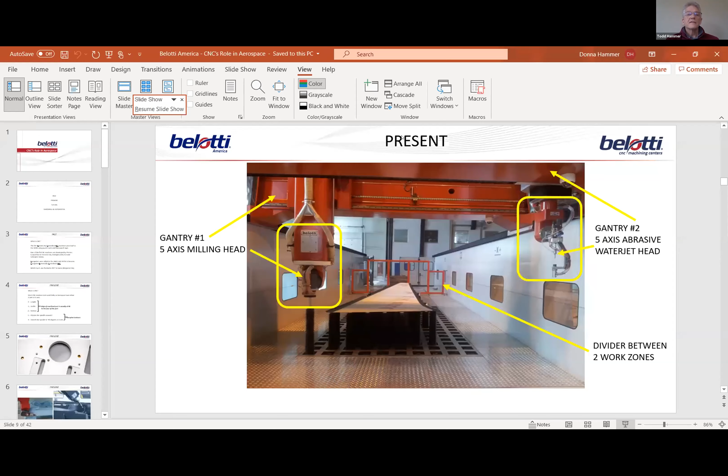I've proudly represented Italy for decades in the machine tool business, and my presentation is just a quick talk on present and future, but I think it's also important to mention a little bit of the past and how aerospace ties into automotive going forward.

For those participants where CNC or NC is not a familiar term: NC is numerical control and dates back to the 1940s, when punch cards and punch tapes were used by a company called Parsons Corporation in Traverse City, Michigan, to start making helicopter blades using digital input.

Fast forward to 1977, and Belotti Spa was formed in Suisio, which is a small village just outside of Bergamo.

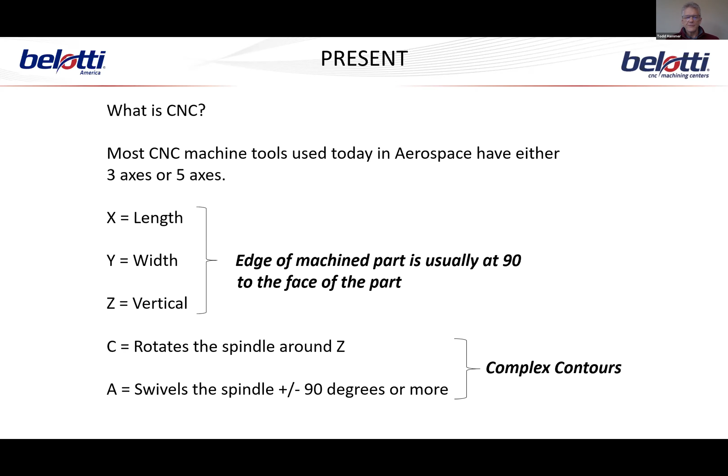In the aerospace industry, we generally see one of two types of machines used, either 3 axes or 5 axes. X and Y indicate the length and width of the machine, and Z the vertical. More often we see 5 axes, which adds a C axis that rotates around the vertical, and an A axis, sometimes referred to as the B axis, which swivels around the C axis.

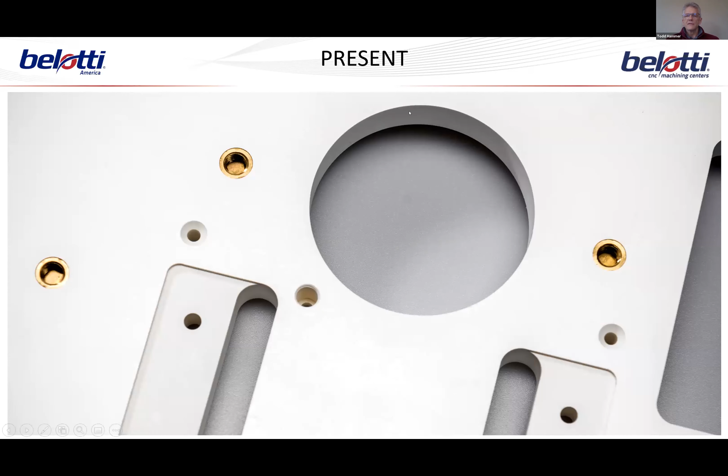Here you see a typical 3-axis application where all of the machining is perpendicular to the face of the part. And here you see a couple of typical 5-axis applications where you're shaping a contour, or in this case, trimming and drilling.

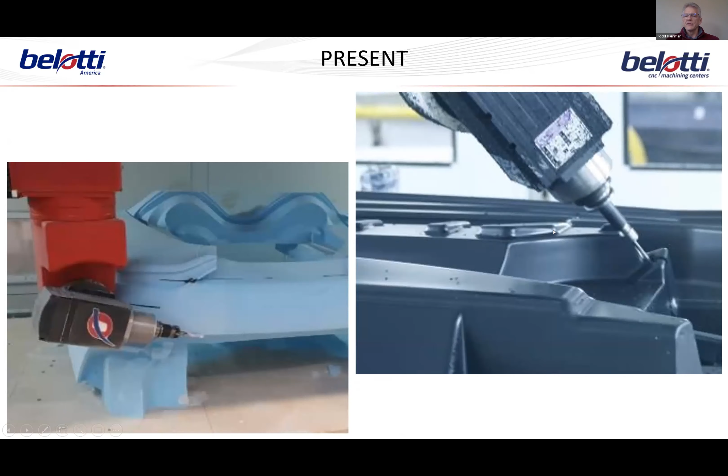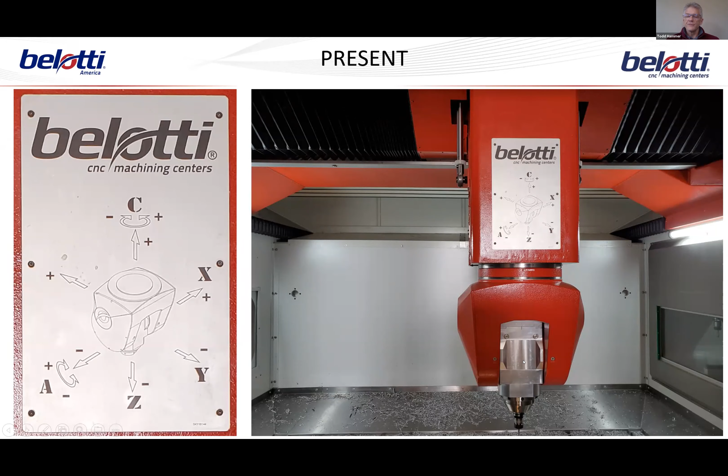Here's a closer view of these 5 axes and an example of a typical 5-axis head: your Z-axis, your X-axis, Y-axis, and turning of this head for C, and swiveling of this spindle.

What's important is, even though an aerospace part, in this case aircraft, may be very thin and appear flat, because of the makeup of the composites, it's still necessary to mill this with 5 axes in order to have the cutting tool perpendicular to the composite material.

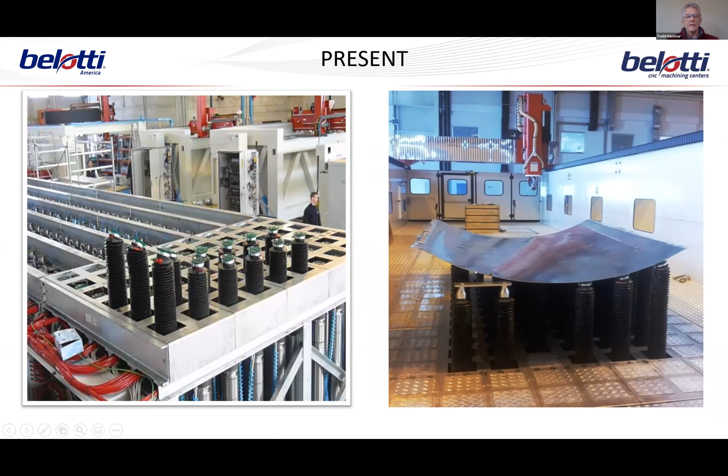Here's a typical application in aerospace where it's difficult to see, but we've got a machine with 2 gantries. One gantry has a 5-axis milling head, and the other gantry, closer to the viewer, has a 5-axis abrasive water jet head. In this technology, we'd use the abrasive water jet head to rough out the geometry of the part, then come behind it and do a final trim and possibly some milling of pockets or drilling of holes.

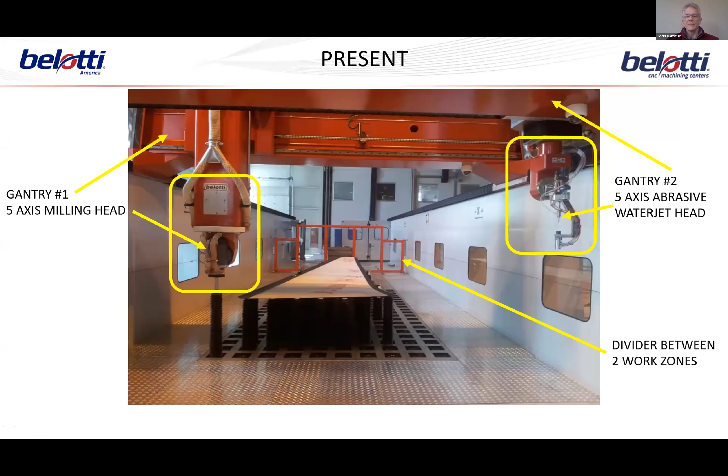Nowadays, if you've flown on an A350 from Airbus or a 787 from Boeing, you'll see there's a lot of talk about composites, but there's still a tremendous amount of aluminum used in the industry. It's really a daily contest, with the aluminum industry trying to take business away from composites, and composites trying to drive down the cost of composite components to be competitive with aluminum.

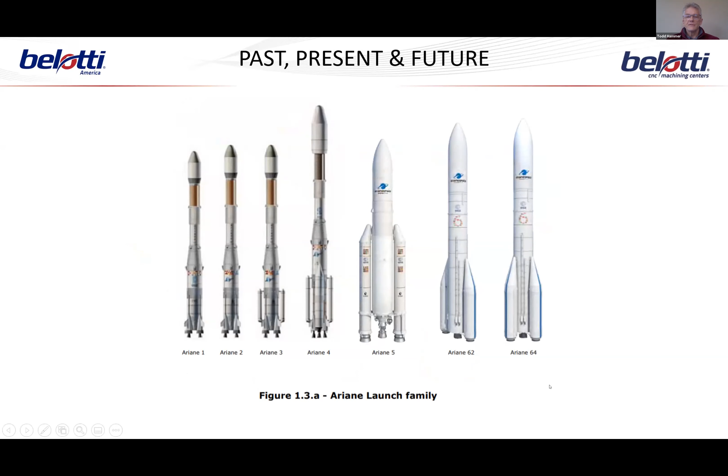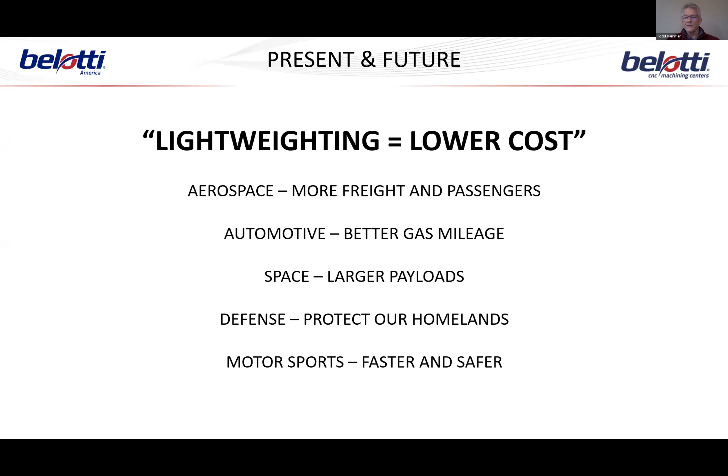For those from Italy and Europe, you'll be very familiar with this slide showing the new generation of spacecraft, and what all of these have in common with automotive is it's all about lightweighting. Lightweighting equals lower cost, whether that's more freight or passengers in aerospace, better gas mileage in automotive, larger payloads in space, not being detectable by radar in defense to protect ourselves, or going faster and being safer in motorsports.

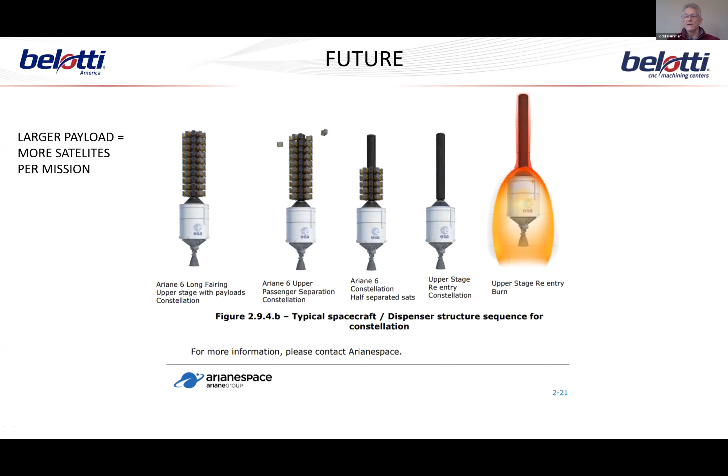Here's a slide that shows the more satellites we can stack in the spacecraft, the lower the cost. So the lighter we can make this entire spacecraft, the more satellites we can load in, driving that cost down.

This is very much a global industry. As you can see from this slide, we have countries around the world participating in just this one program.

Italy—setting aside the manufacturing of the 787—Italy is a very strong player when it comes to aerospace and automotive, in that a great deal of machinery is manufactured in Italy and used around the world to machine these parts, either at an OEM, tier 1, 2, 3, and so forth.

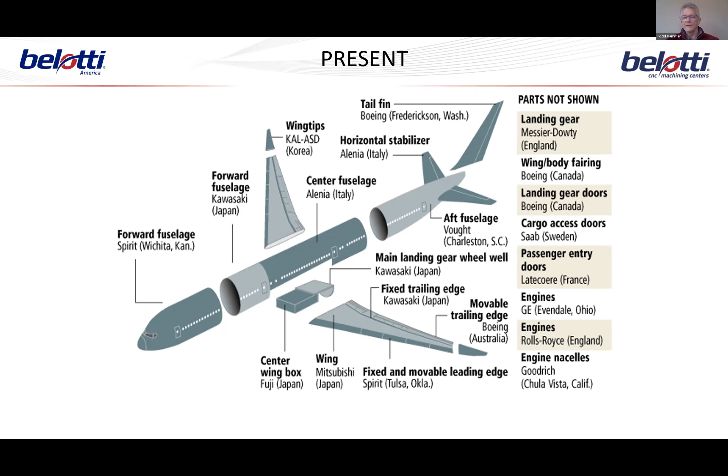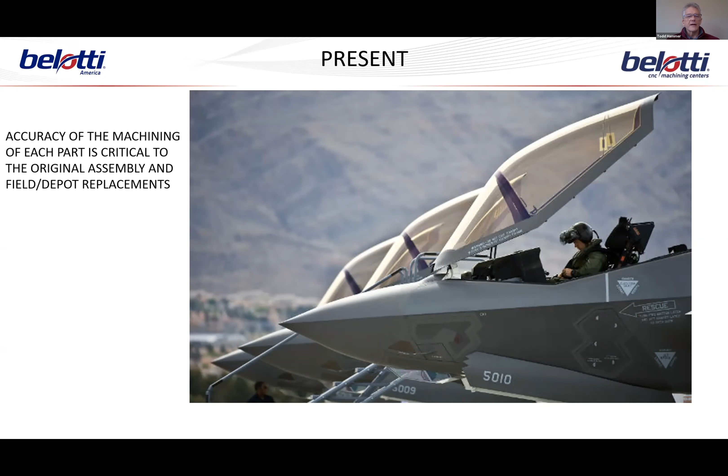Nowadays, and going into the future, machining accuracy is becoming more and more important, because in order to drive down cost, we've got to create assemblies that, sure, are easier to assemble at the OEM during original assembly, but more importantly, out in the field or the depot, they are bolt-on components with very tight tolerances that bolt on just as easily as a replacement part for an automotive application at a local auto repair shop. So we're constantly driving toward finer and finer resolution on our tolerances.

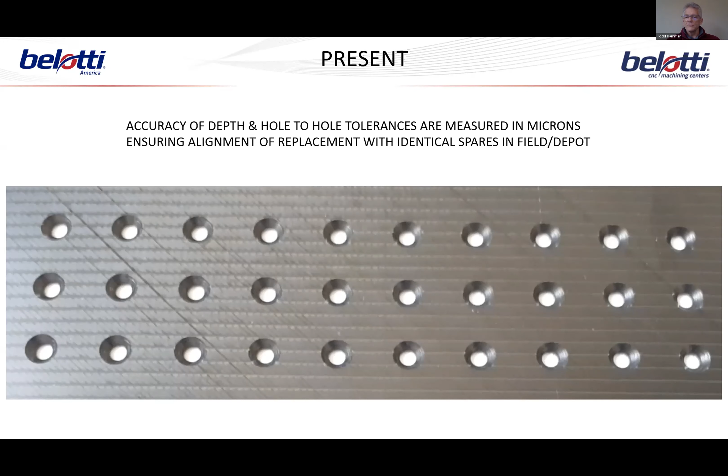Here's an example of a simple countersink test provided for a composite application, and we're down into single-digit microns in terms of accuracy for tests like this, which makes it quite easy to bolt on, for example, that new canopy for a fighter jet.

Why composites? As you can see from this chart, steel, which we'd all consider a very strong material, is at the bottom end compared to traditional aluminum and titanium uses. Titanium, the strongest of those, is only equal to glass fiber composites until you start orienting those fibers in different directions. Then, of course, carbon fiber becomes stronger by a magnitude of 5 times.

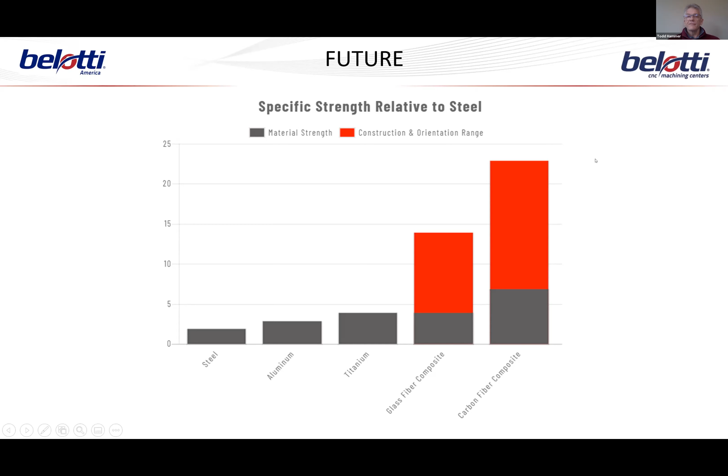Going forward, we take the very labor-intensive carbon fiber parts that are laid up by hand today, and companies around the world are racing to get these parts manufactured at a much lower cost, yet still flyable. Here's an example from an article just this last week in Composites World, where Airbus is sponsoring the Wing of Tomorrow program.

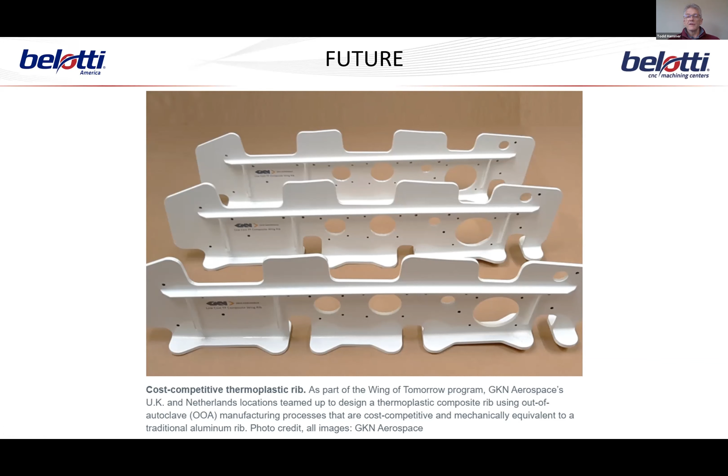A thermoplastic composite rib is being provided as a demonstrator to prove out the reliability of that technology. Thermoplastic composites really uses technology we'd consider old in automotive, adapting it to something that is a very low volume application compared to automotive.

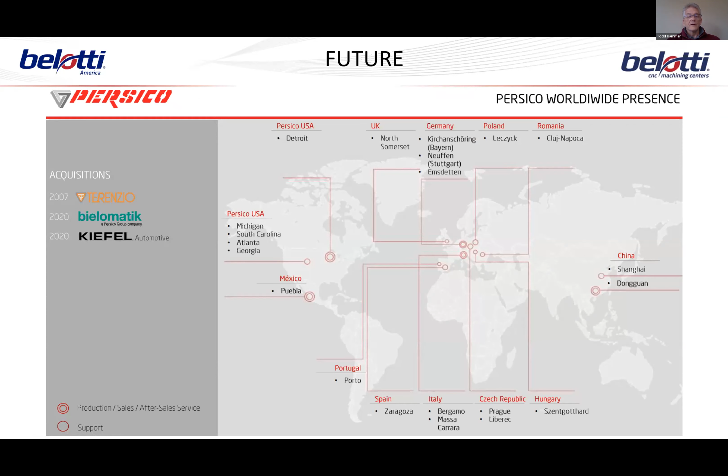I had the privilege last week, while I was in Italy, to tour one of Persico's facilities just outside of Bergamo. Persico is another Italian manufacturer that is really active worldwide, like Belotti, in helping industry drive down cost.

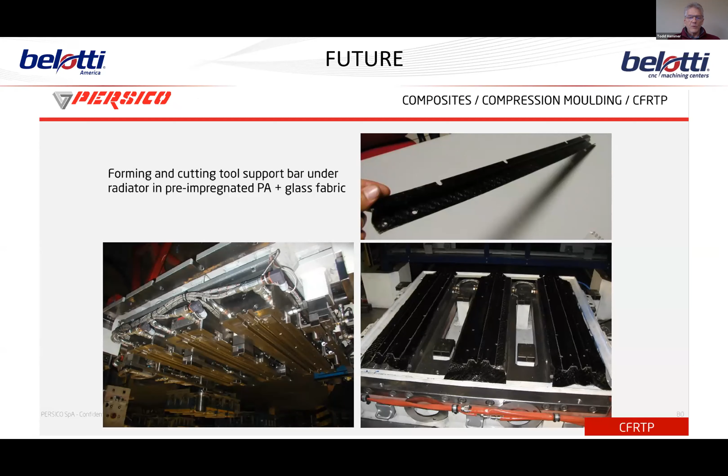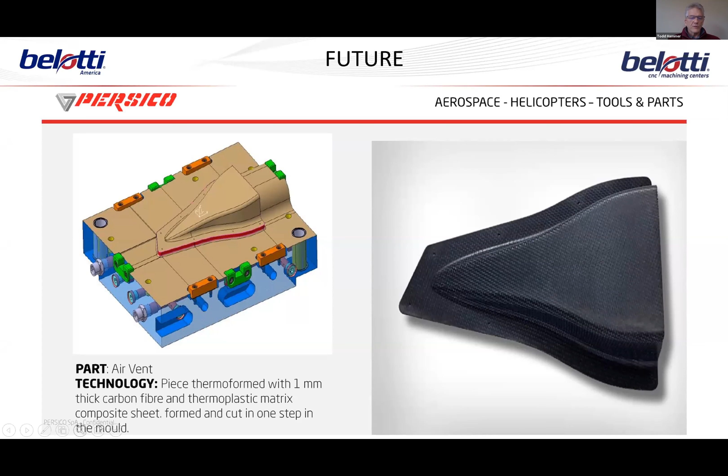They were kind enough to share a few slides for this presentation, where they're working on taking old technology from automotive and forming and cutting in one step, in the mold, parts that are typical aerospace parts. Here you see a few parts from helicopter applications.

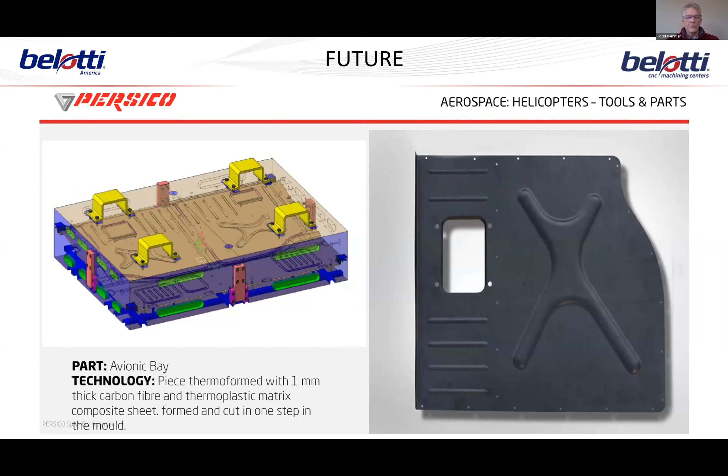Even though Persico is a customer of Belotti's, what interests me most going forward is that the faster these parts can be produced, the more demand there is on companies like Belotti to machine the parts more efficiently to try to keep pace with folks like Persico.

So the next few slides will be some small examples that we see helping aerospace in the coming years, as those tier 2 and tier 3 suppliers become more efficient, lower cost, and closer to that automotive pace.

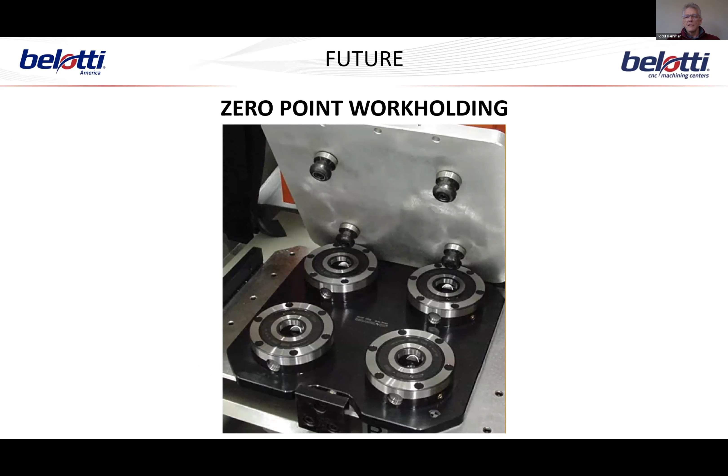Here's a simple example of a device that is very common in the machine tool industry, but not so common in composites machining. What this does is give you the ability to introduce, or reintroduce, a fixture to a machine tool and have it repeatable, virtually perfect, within microns. Here's an example of a customer that is a tier 3 supplier to an aircraft manufacturer.

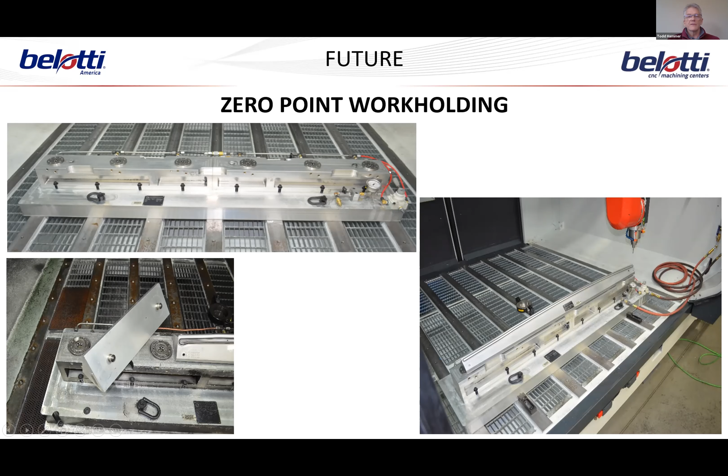We heard that this was a purpose-built, specified machine that incorporates a real short part on a zero-point tool, which allows, as you see in the lower right-hand corner, a longer part. So within a minute or two, you can change over from trimming and drilling a very short part to something longer, and the configuration can be anything the application requires.

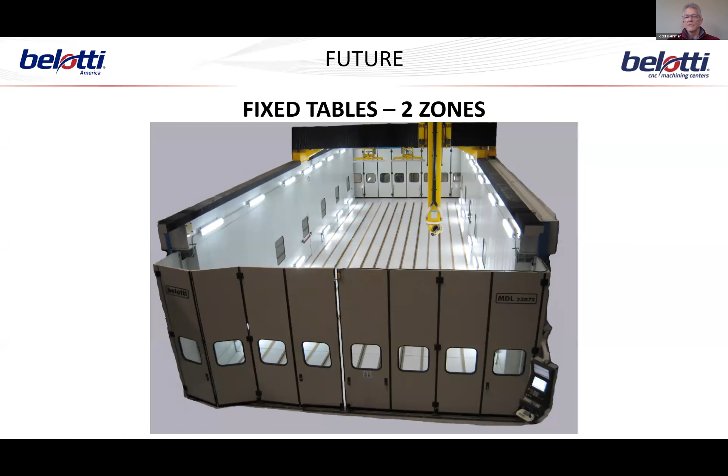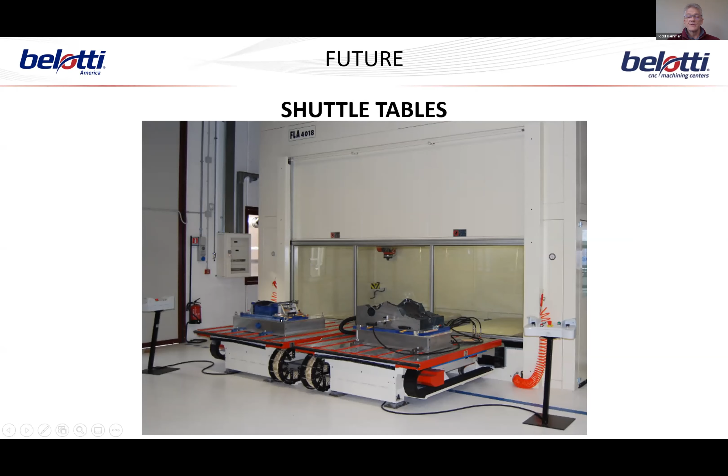Here's a smaller example where we introduce shuttle tables, where we can be machining inside the machine on one table while we're unloading or reloading, maybe exchanging the fixture on another table, and then these alternate back and forth.

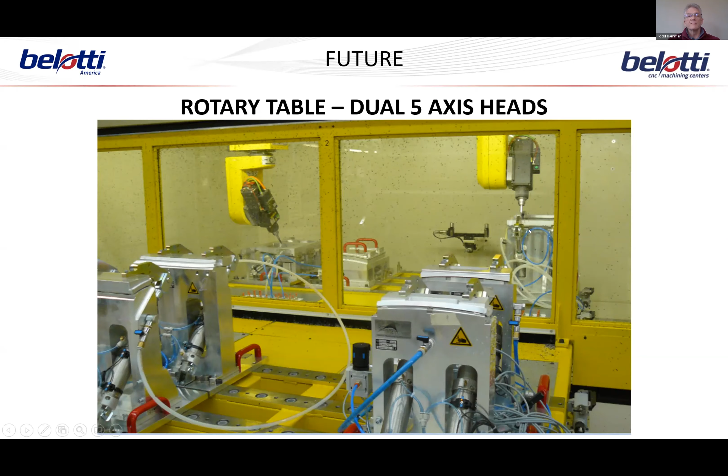Here's one of the earlier slides illustrating the divider that allows us to unload and reload at one end while we're machining on the other end.

If we look at these raised pods here, you notice that these are fixed in the floor.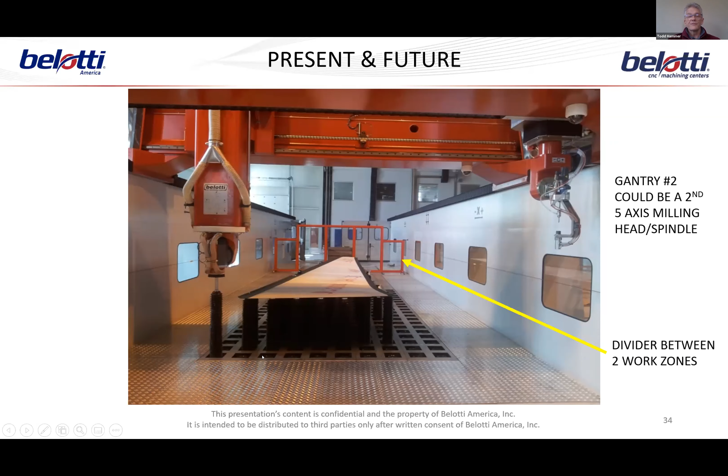Going forward, the future is that we're starting to drive these rows in and out of the machine, driving them electronically back and forth to suit the part.

And then let's say this afternoon or tomorrow you've got an application similar to those I showed earlier, and you want to drive some or all of these into the machine over that cast iron T-slot table to create a very flexible machine tool.

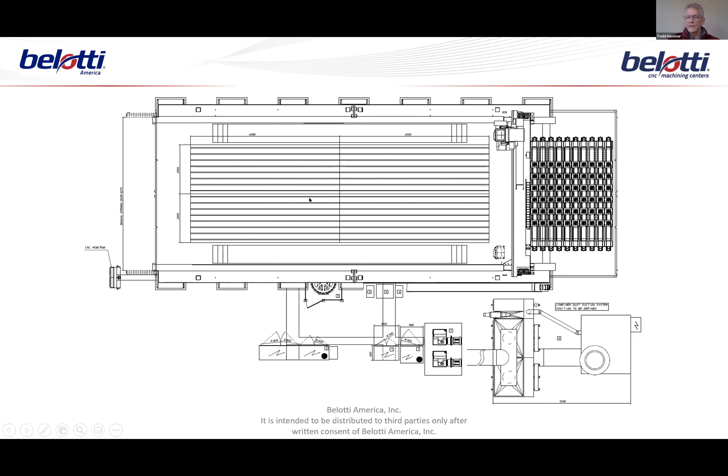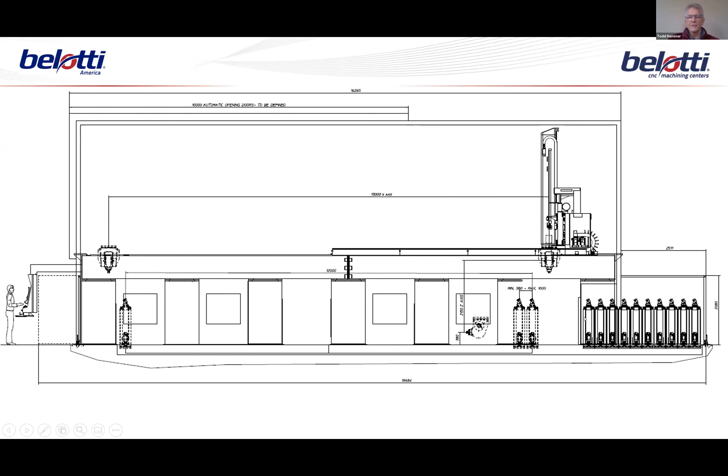We've got a speaker a little later on who'll go into great detail on 3D printing, or additive manufacturing. Belotti has partnered with a company in the Netherlands named CEAD to create a trade name, Bead, where we'll take CEAD's additive technology and install it in our large machines.

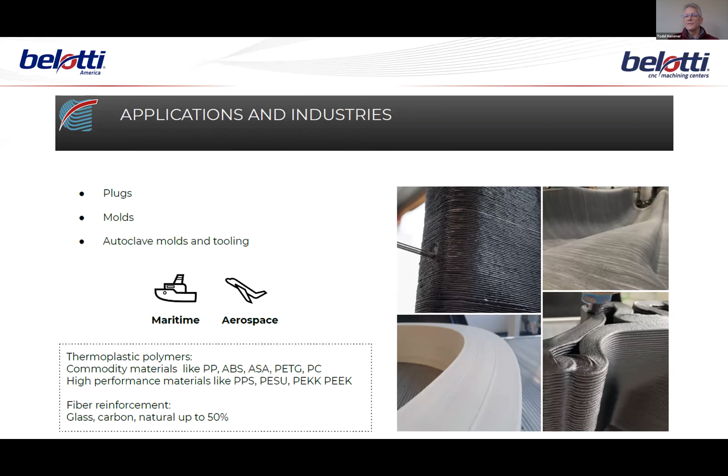So we'll have applications, for example, where we'll print very large tools for the nautical and aerospace industry, whether those are plugs, molds, or tools for autoclave curing. We really look forward to bringing that to the aerospace market.

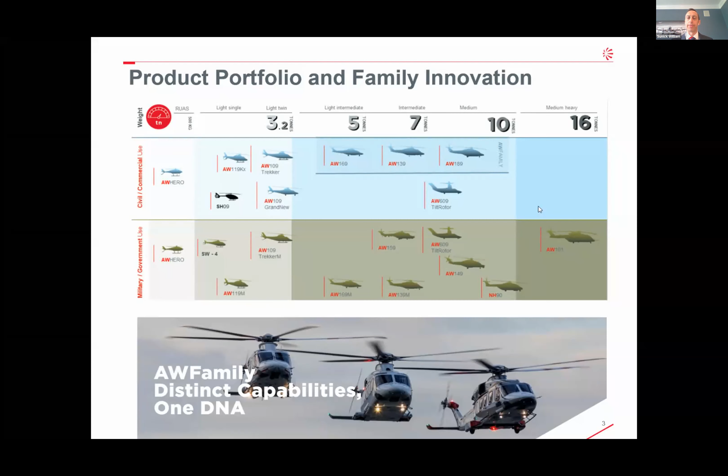Now, going forward, I'd like to share a new aircraft we're developing—in fact, a new class of aircraft, the AW609 tilt rotor. You'll notice in the photo it harnesses tilt rotor technology, with twin nacelles and twin engines that enable it to take off vertically and fly very similar to a helicopter. However, those nacelles rotate 90 degrees down, enabling it to fly like a fixed-wing twin turboprop airplane. This enables the best of both worlds: the runway independence of a helicopter, where you can take off almost anywhere, with vertical maneuver capability during flight like mid-mission hover, combined with the excellent higher speeds, longer ranges, and higher altitudes afforded by turboprop airplanes over helicopters. So you really have the best of both worlds in that tilt rotor technology.

That's one technology, but adding to that, composites—and Todd did a great job, I enjoyed his presentation talking about composite technology, which began on the military side, and we see it going on to the commercial side in airliners, and now we're starting to see it in rotorcraft, first again on the military side but now on the commercial side. So the AW609 takes full advantage of that and has principal structures made of composites. And going a step further, our airframe, the cabin section, is pressurized, which is unheard of in any rotorcraft.

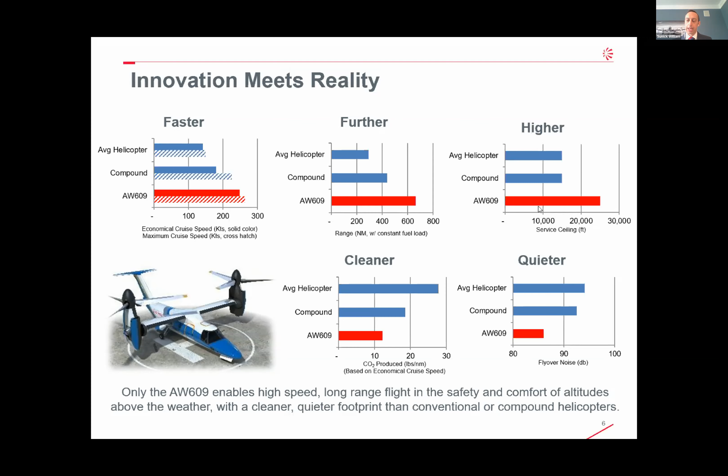Thank you, Mr. Sunik. I have a question that requires a quick answer. So in case someone in the audience is interested, what is the price tag of this aircraft, roughly?

It varies on application. You saw multiple missions there, whether it's utility type, oil, gas, offshore energy, resource development, search and rescue, EMS, VIP, corporate type. We're still setting the final price, but typically it'd probably be between $25 and $30 million.

There is a question, but I'm not sure we have time. I am concerned. Let me see if you can answer quickly in 1 minute: does the current infrastructure fully support the capability of this aircraft? If you can answer in 1 minute, please.

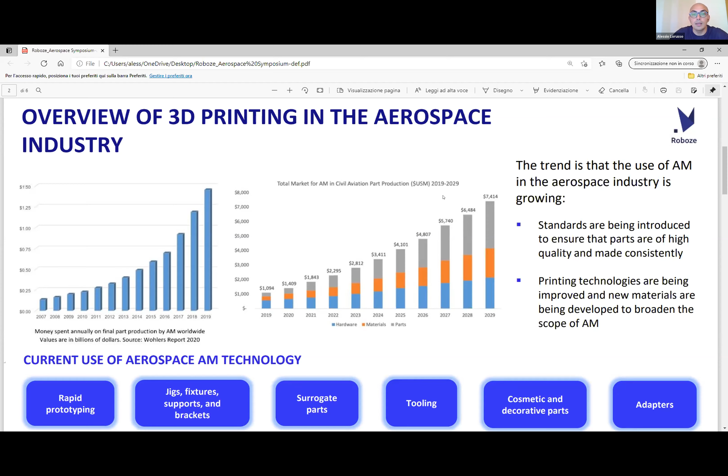A quick overview about 3D printing in the aerospace industry. Currently, the technology is mainly used to create prototypes, jigs, fixtures, molds, for example autoclave, hand layup composite, molding, tooling in general. But the technology now is getting ready to produce real end-use parts capable to fly more and more. The expectation over the next 8 years is that the 3D printing sector will reach almost 7 billion in business in the aerospace sector, including hardware, so 3D printers, materials, and parts printed through service providers. So the adoption of the technology in the aerospace sector is becoming huge year after year.

Of course, PEEK material is one of the most performing polymers in the entire world. We introduced for the first time in the additive manufacturing sector, for FDM technology, so fused deposition modeling, the PEEK material back in 2016. We were the first in the world to make possible printing PEEK material, which is not a very easy material to process because it requires very high temperature to be processed, in terms of extrusion temperature and in terms of the temperature in the heated chamber. So we process this material at 450°C, very close to the melting point of aluminum, for example.

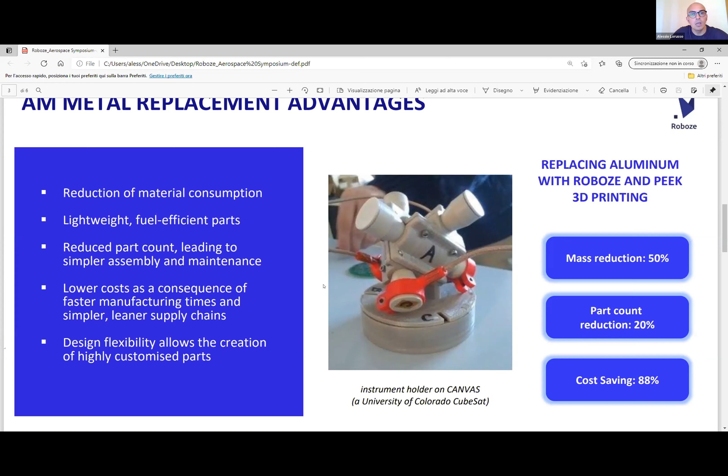I'll be very fast because I understood that we are late. So a quick overview about our technology. As I was explaining before, we are very concentrated and focused in superpolymers and composite materials.

Today, we demonstrated that the technology is now ready and capable to replace metals, thanks to the fact that we reach incredible mechanical properties like 140 megapascal tensile strength.

We certified material for aerospace use. Our materials are UL 94V0 certified, so flame retardant, with smoke toxicity certification.

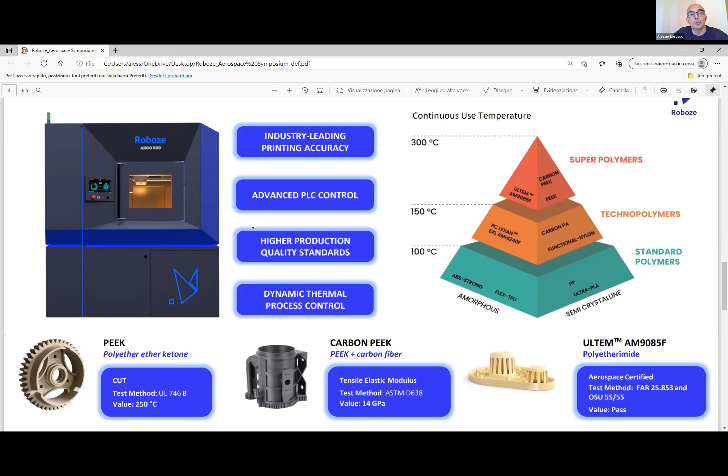And we are now ready to ensure the repeatability of parts production thanks to our technology that we call beltless. Our 3D printers are more similar to CNC machines in the way they work. We can ensure 10 microns accuracy and repeatability over time, thanks to the fact that our 3D printers don't use belts made of rubber-like material, but use mechatronic gears to create very accurate and repeatable parts.

We introduced some business models in the last couple of years with the intention to democratize more and more our technology. So today we provide our machines and materials with a subscription fee.

And thanks to this, we are creating a huge number of small manufacturing hubs in the world that we call Roboze 3D parts partners. These partners are our customers that provide parts service to additional customers. So we are creating the connection between the demand of printed parts and the offer of printing parts provided by our customers.

We are capable today to produce up to 10,000 parts in the world in very few days, asking our clients to produce parts for us.

At this point, we have more than 400 machines in 24 countries in the world, and we have printed so far more than 50,000 parts in the last 6 months.

Here we can see a very short application we did in the aeronautics sector. This application is called hand-lay-up composite molding. Here we are helping aerospace companies to replace aluminum or generic metal molds with PEEK filled with carbon fibers. The very good thing is that this material printed through our technology can withstand more than 7 bars

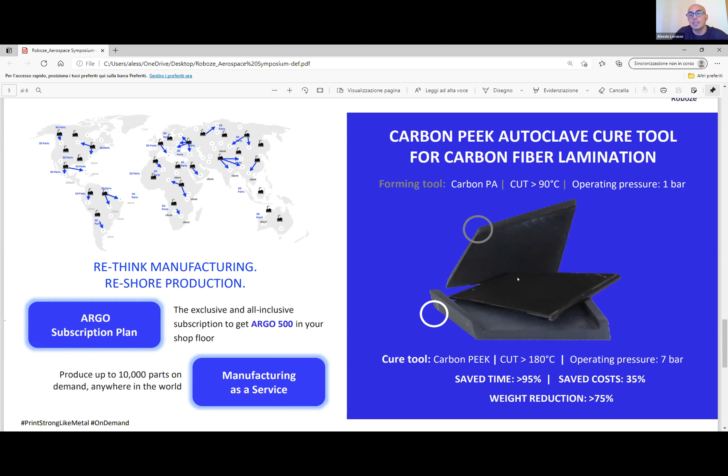at up to 180 C in the autoclave for composite parts consolidation. So this is a very aerospace-ready material for very extreme applications.

At this point, we are more than 100 employees, and we have 2 headquarters. The US headquarters is based in Houston, where we have parts production capability and all our business operations. In Europe, in Italy, we have R&D, engineering, and material science and chemistry team.

So we are very interested in getting in touch with people participating in these webinars. If you have any kind of questions, or would like to test and understand the capabilities offered by our technology, we will be very pleased to get in touch with you and let you test and understand what's today possible thanks to additive manufacturing.

Thank you, Mr. Lorusso. Thank you very much. Your presentation shows how Italy stays up to speed with the latest technologies.

Do you see your composite materials for additive manufacturing progressing in aerospace applications as it happened to conventional composites? Yes or no? And what do you think are the limitations to their implementation?

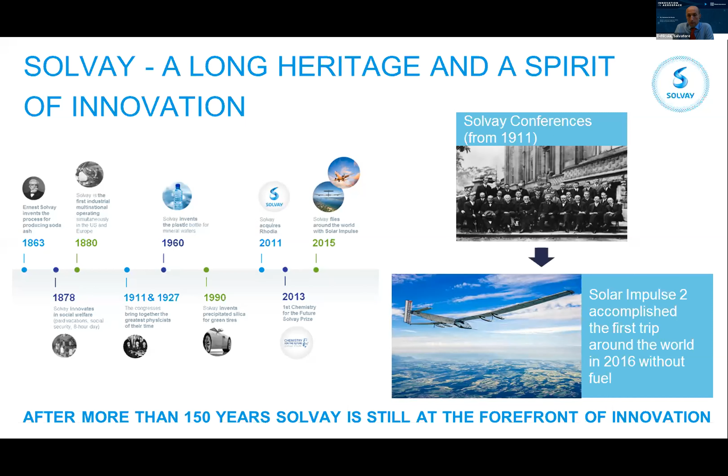Demonstration of this is that a few years ago, the Solar Impulse 2, relying on Solvay technologies, completed for the first time a trip around the world without a single drop of fuel.

Few numbers now: Solvay has more than 23,000 employees in 74 countries. Last year, the net sales were about 9 billion euros. Solvay is a global leader in chemicals, in materials, and in providing solutions to industry, in particular to the aerospace industry, mobility, electronics, and healthcare industries. However, even being a leader, the company remains really focused on people and on sustainability of our business, in particular on green solutions to protect our planet.

In the title of the presentation, I said that composites are a newborn technology. Why newborn? Because if we look at the development timeline for metals, we can see that we have been using metals for 10,000 years now. Even the alloys we use today in the aerospace industry, aluminum alloys or some types of steels, have however been developed more than 100 years ago. While for composites, the story started in the middle of last century with glass fibers, if we neglect the mud brick used in prehistory.

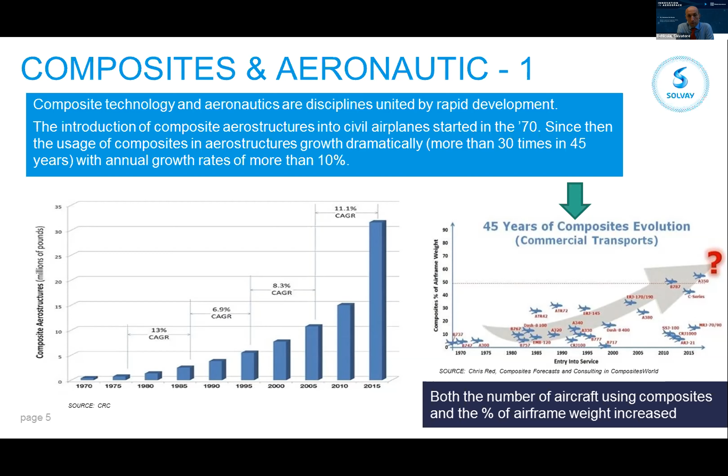Which are the technologies that were able to enable the use of composites in the airframe, in the aerostructures? We can see here a direct correlation. Let's start, for who is not very familiar with composite materials, with the definition. Composite materials can be defined as a material having at least two different phases and an interface. In a few words, we can say that a composite material is made by fiber and matrix.

In the 70s, several types of fiber were developed, like Kevlar, E-glass, standard modulus carbon fiber, and boron fibers, while on the resin side, the chemistry of epoxies made a giant step, allowing the introduction of composites in aircraft secondary structures like radome or rudder, spoilers, flaps, and other movable surfaces, both for commercial and military applications.

During the 90s, another significant step ahead was made by the development of intermediate modulus carbon fiber and of epoxy using toughening technologies. Toughened epoxy and intermediate carbon fibers opened the door, together with the BMI resins for high temperature, to the use of composite materials for primary structures like empennage or primary structures for defense applications.

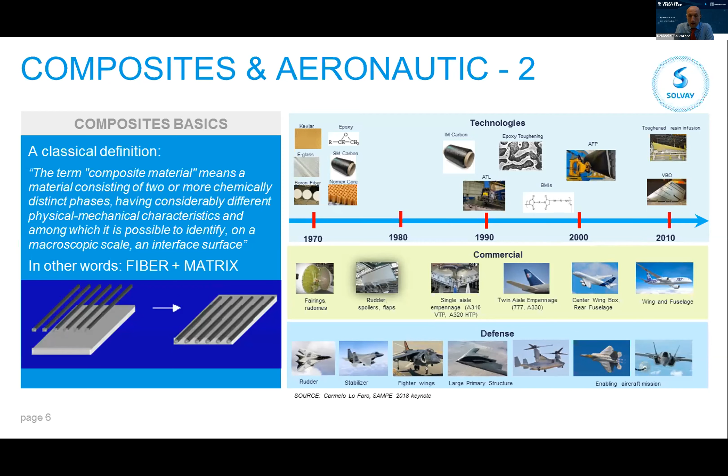Where we are today, in particular, we can identify three main technologies that are making the difference in the aerospace industries.

One is the development of out-of-autoclave materials. For who is not very familiar with composites, composite materials are normally laid up and then consolidated in large autoclaves using high temperature, usually 180 degrees Celsius, and high pressure up to 10 bars. Of course, this implied high cost, high manufacturing cost, and some issues in manufacturing very large structures.

Now we've developed materials that are able to reach the same mechanical performance of classic composites, but without use of an autoclave. They can be cured in a standard oven, and this allows extending use of composite to very large structures. The second technology is liquid infusion.

Liquid infusion allows realizing very complex parts, like the one we see in the example here. There are fan blades for engine applications, or very complex shapes like the hinge fitting that we see in the picture. And the third one is particle toughening.

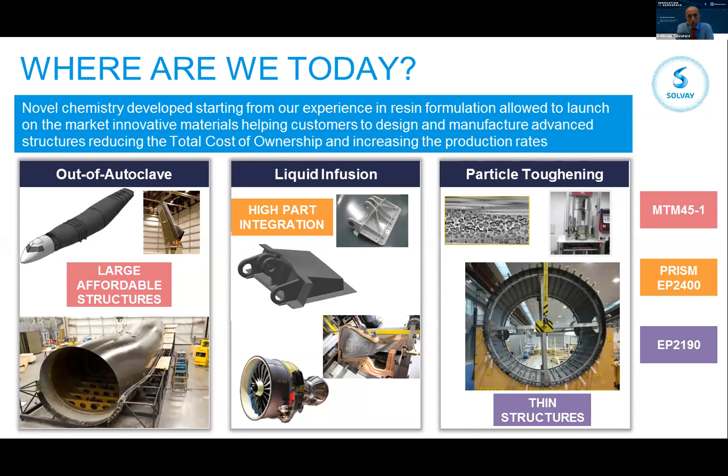Well, what does the future hold? We believe that to grow further, composites must deliver more value, and in particular address the needs of the emerging markets: urban air mobility, autonomous vehicles, electrical vehicles, sustainable solutions for mobility.

And we know that this added value lies within industrialization. Composites are now entering the industrialization era, where to some extent we can say that the production system can be more important than the product itself, because a product that is not sustainable, that cannot be produced easily while respecting the increasing demands of the markets, will not be considered competitive.

And the answer, we believe, lies mainly in 4 technologies. One is press forming, another one is bonding, third is function integration, and last - and we have just seen the very interesting presentation from Mr. Lorusso - additive manufacturing.

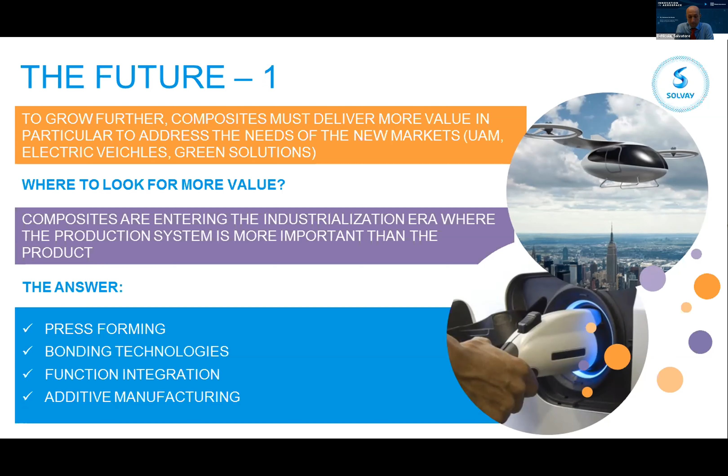Just a few more details on each of these technologies. On stamping, today, thanks to new chemistry and new processes developed by Solvay, press forming is possible for both thermoplastic and thermoset composites. Press forming allows complex design and a very high manufacturing rate. We can finally introduce to aerospace something that so far has been dedicated only to automotive markets.

The production of parts with a very high takt time, so parts produced in minutes instead of hours. This will make the difference for new emerging market sectors, as I said before, like urban air mobility, and also on very large aircraft, reducing cost.

The second interesting technology we are looking at is bonding. Today, aircraft - both metallic and composite - use millions of rivets. And this means issues in terms of safety, in terms of weight, and in terms of manufacturing problems, because before installing the rivets, the parts must be drilled and then riveted.

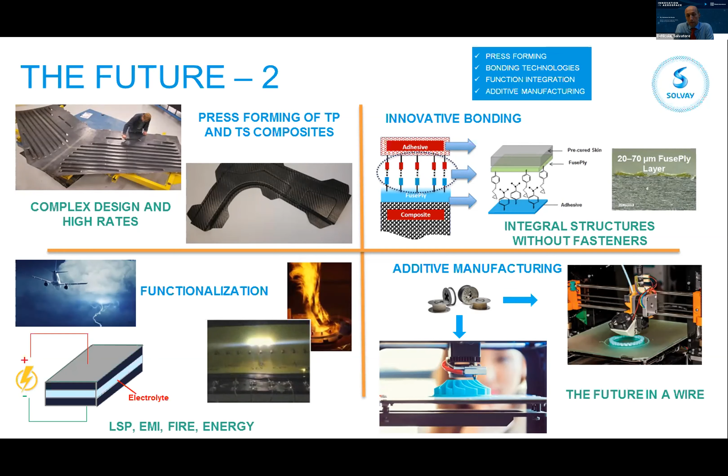And the last one is additive manufacturing. I don't want to add more words on this. We really believe that this is the future. Starting from a simple wire today, we can manufacture very complex parts, and this is enabling the use of composite materials on items that so far have only been manufactured with metals.

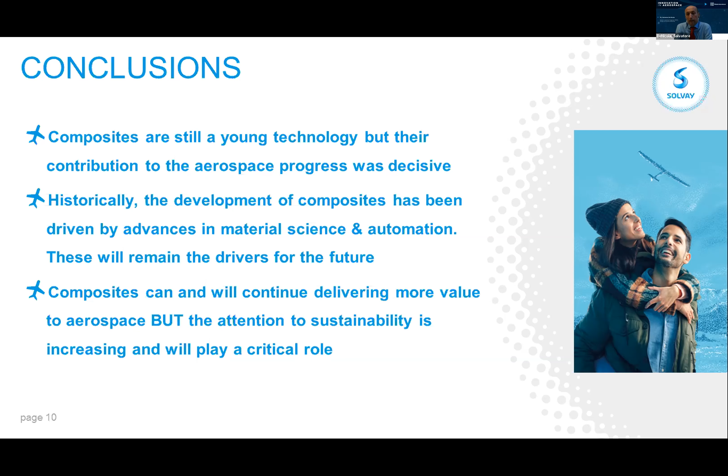In definitive, we can see that composites are a young technology, but their contribution to aerospace was for sure very decisive, and this will remain the driver for the future. Composite developments will still be driven by advances both in material science and in automation, so composite materials can continue delivering added value to aerospace and to our day-by-day life. But the attention to sustainability is increasing, and we believe that it will play a critical role, because the future must be sustainable. Thank you.

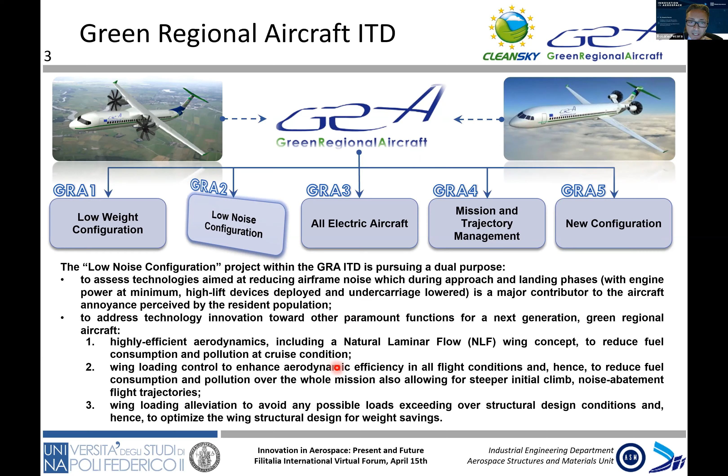That being said, the first task we received from the industrial partner, in this case Leonardo Aircraft, which was managing the ITD, was to make a proof of concept. Basically, we had to design, manufacture, and validate a morphing architecture that enabled modifying the camber of a single flap element in compliance with a target reference shape.

Why this? The basic idea behind this proof of concept was very simple in principle. The idea was to replace a classical double slot flap system, which you can see here, with a single slot flap system. When you do this kind of replacement, you gain advantages in terms of complexity of the system, but you lose something in terms of aerodynamic efficiency in generating high lift for takeoff and landing, because you need much more camber, much more curvature for this airfoil in order to reach the target high lift you need for your aircraft.

So the idea was to replace this complex system with a simpler one, but characterized by morphing capabilities, so it could be deployed out of the wing and cambered. That means the shape of the flap could be changed by increasing the curvature of the airfoil itself.

We worked as structural engineers in this task, and basically the way according to which we had to morph the structure, so change its shape, was given to us by other partners working in the aerodynamic field. They discovered what was the target morphed shape of the airfoil we had to reach with our morphing structure, in order to enable, with this configuration, the same high lift performance of the double slot system.

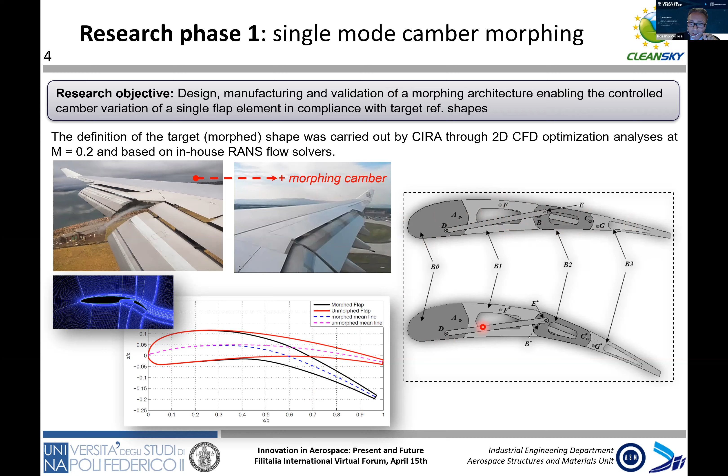Going into 3D along the span, you see how things worked in this proof of concept we elaborated. You recognize here the segmented rib, and here a portion of the flap in true scale, limited span. We have three ribs delimiting two bays and some stiffening elements along the span to ensure adequate stiffness in withstanding external loads.

Closer to each rib we have a rotary actuator. The rotary actuator generates a rotation of a shaft perpendicular to the rib plane. This rotation, through a gearbox, is switched into a rotation in the chordwise direction.

This rotation in the chordwise direction is transferred to an endless screw that moves back and forward the cursor linked to this leverage, which finally moves this block up and down. So this mechanical arrangement allows the rotary actuators to move this block up and down.

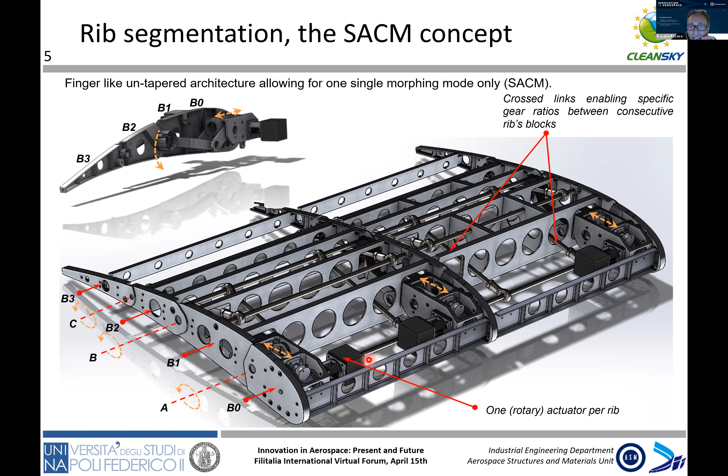While doing this, the action of the actuators is amplified through all these leverages, so we do not need very large actuators to move the flap under the relevant loads on this segment. When designing a morphing structure, you are designing a structure with double functionality: the basic one is to withstand loads with adequate margin of safety, and the second is to do that while changing shape, preserving the shape under the action of load. So these actuators are an integral part of the structure in reacting to external loads.

This conceptual layout was the result of a very long design process, from concept identification up to advanced design and kinematic design. Finally, we made the demonstration of this first concept. We manufactured a prototype, all in aluminum alloy, and performed experimental tests on this small portion of the flap.

We did static tests to see that the device was able to withstand external load with positive margin of safety, with no permanent deformation. Then we performed ground vibration tests to understand how the dynamics of this new structure would influence the dynamics of the wing structure where this flap has to be installed. And then we made functionality tests to prove that we were able to morph the shape according to what the aerodynamics told us to do.

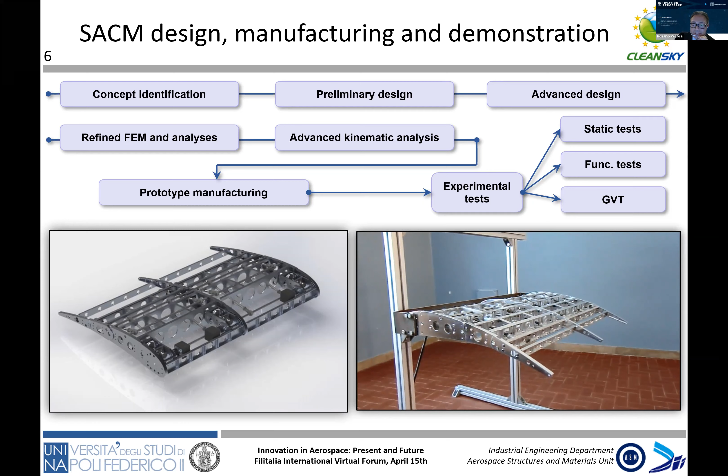You can see in this video how this structure, segmented and characterized by very conventional mechanical arrangement, can actually change shape in a very smooth way, in compliance with what was required by the aerodynamicists in terms of final shape of the flap segment. Here we have the reverse of the transformation.

After this proof of concept, the industrial partner we were working with, Leonardo Aircraft, was very happy and satisfied. So they increased our budget a little bit and asked us to tackle a more challenging task: provided that we demonstrated we could morph a portion of the flap structure, now move to the investigation of a larger portion of the flap.

So basically they gave us as investigation domain a wider portion of the flap, characterized by a span of 3.6 meters and tapered configuration with a root chord of 1.2 meters and a tip chord of 0.9 meters.

We had to demonstrate that we were able to morph this kind of structure, but with reference to a wider domain, and with reference to another important requirement: we had to implement two different kinds of morphing capabilities. So not just one morphing mode, as you saw before where the airfoil changed shape, but two morphing modes. What are these two morphing modes and why?

The first morphing mode is the overall camber morphing of the airfoil, as you have seen before in the proof of concept. So basically you change all the curvature of the airfoil, all the camber, and you are supposed to implement this morphing mode when the flap is deployed, out of the wing. Why do you do that? Because by cambering you increase the performance of the aircraft in generating high lift, and you need higher lift in takeoff and landing, so you morph this part completely.

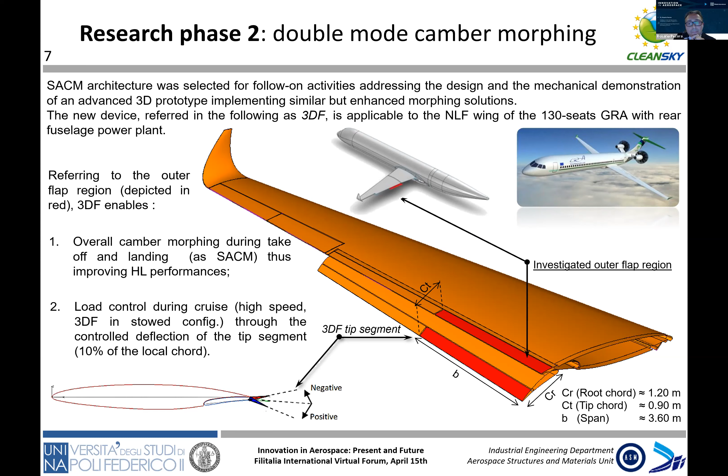When you are in cruise and the flap is stowed in the wing, just this portion of the flap that comes out of the wing was required to move up and down in order to control the load distribution on the wing and gain some advantage in terms of aerodynamic efficiency. So we had to assure two different kinds of morphing modes, also associated with different zones or areas of the flap that had to be morphed.

The first concept we elaborated to solve this hard problem was to extend the degrees of freedom of the finger-like rib we had generated in the first phase of the project. The most simple way to do that was to make the crossed links, the nerves of the finger-like rib, extendable. So you have the same arrangement of the rib I showed before, but one of the links can be extended in length.

Why this? Because if you extend this link in length, you can generate a torque around this hinge and move the last portion of the flap up and down, as was required.

So with this arrangement, we have a double actuation for the rib. One actuator drives the classical leverage we've seen before, and with this actuator stopped, meaning this length is fixed, the flap changes overall camber. When this actuator stops, the flap is fixed in shape. The other actuator can be activated, and thanks to a particular gearbox, this generates the extension and contraction of the link, moving just this part.

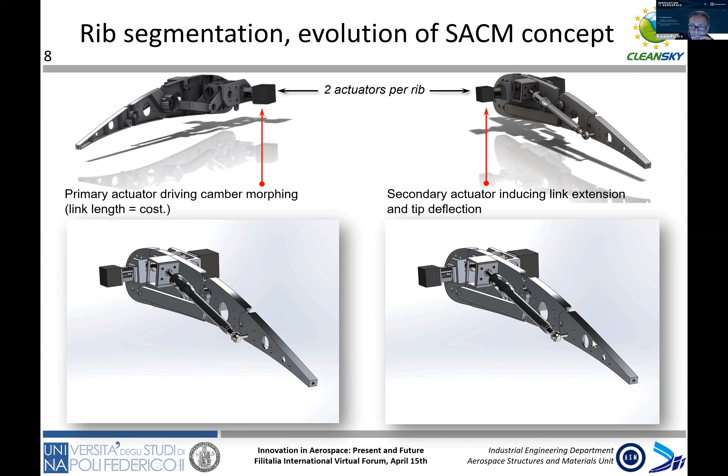We went through the overall 3D design of this architecture. This is how it looked in this rendering, mounted on a real aircraft. Please consider that for all the ribs involved in this layout, there are two actuators per rib, two rotary actuators per rib.

This is just an extension of what we saw in the first preliminary proof of concept. We solved the tapering problem by tapering the trailing edge and leading edge of the flap while keeping a constant chord where all the mechanics is installed. This way, we preserved the fact that all the hinge lines of these ribs were orthogonal to the rib plane, avoiding a lot of complication and jamming problems during the morphing.

While we performed our investigation, we came out with an executive layout that was finally rejected by ourselves because it did not comply with a very important requirement. We had to keep in mind that we were developing new technologies for civil aviation. We can do morphing, we can change the shape of the flap, but it has to be convenient, not only for the impact on aerodynamics, but also for maintenance, installation, and other issues.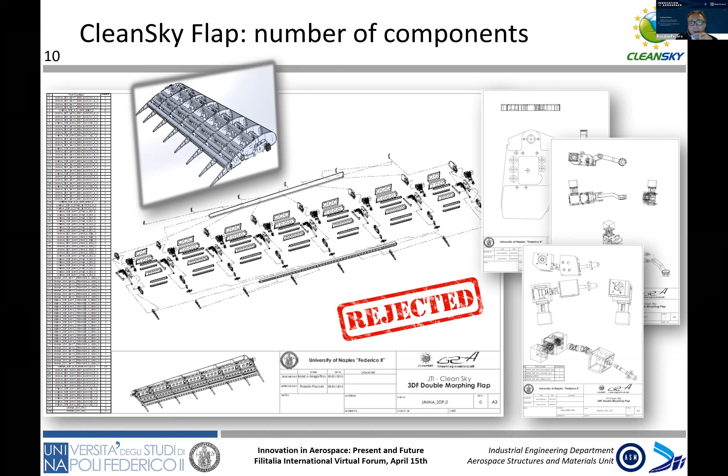So this architecture was too complex to be proposed for real industrial implementation, because it had many actuators, many pieces. We wanted to simplify it a lot, and we finally found a revolutionary layout for the rib, much more compact than before. The rib is always actuated by two different rotary actuators, but this time the actuators are not dedicated to just one rib, but to the two ribs delimiting each bay of the flap.

Moreover, the mechanics was really improved. As you can see here, we have a finger-like structure for the first three elements. These first three elements are mechanically linked and connected, meaning that if we move just one of them with respect to the others, all three elements move as a single degree of freedom system.

This actuator was dedicated to the cambering motion of these three elements, while this one was dedicated only to the flap tab, the last segment. When implementing the overall camber morphing, both actuators had to move synchronously to reach the shape we wanted for aerodynamic reasons. When the flap was stowed in the wing, this actuator was stopped, and only this one functioned, moving the flap tab up and down for load control functionalities.

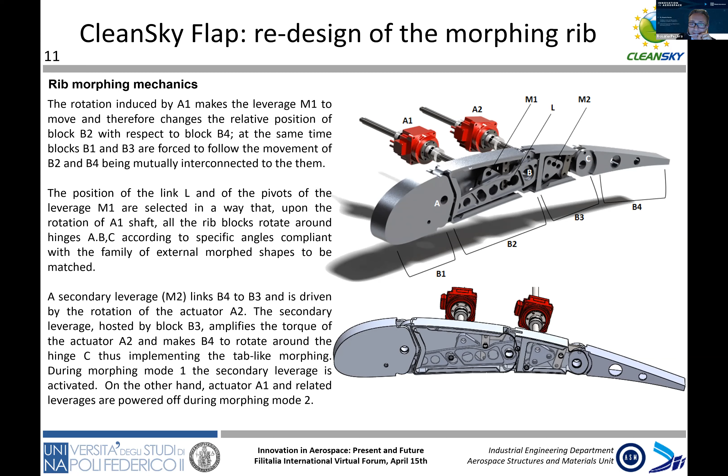All the mechanics you see here inside were just internal leverages in order to amplify the action of the actuators, because one important requirement in Clean Sky is that we had to use electric actuation, going in the direction of all-electric aircraft. When you use electric actuation, you do not have so much torque at your disposal, so you have to figure out how to amplify it through mechanical leverages and mechanical amplification.

This is the layout, how it appears after all the optimization study we did. Basically, we have a couple of actuators per bay, not per rib, so we reduced a lot the number of actuators needed. Moreover, not all the bays are actuated.

Here we installed the controller for the segment. This was just something we did because it was much more comfortable for us for demonstration purposes, to have everything inside the demonstrator. But for a real aircraft application, this controller must be placed into the fuselage.

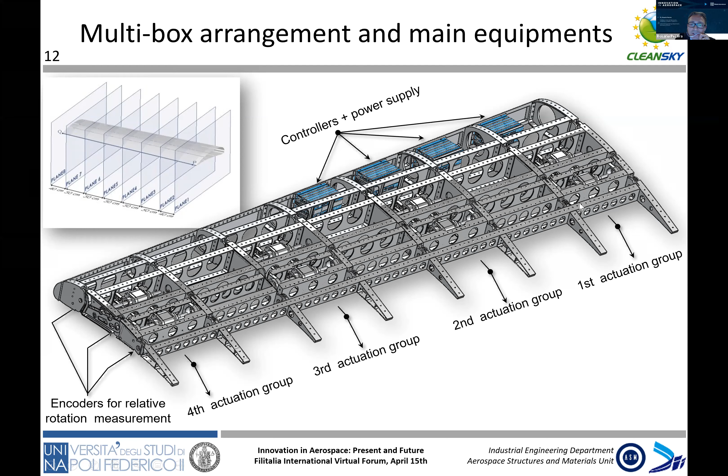All these actuators worked in a synchronous way with the specific control logic we implemented. Basically, we have a primary line of actuators and a secondary line of actuators. This line moves when we had to move just the last portion of the flap, and this one, together with this one, moves all together to morph the entire camber of the flap itself.

The entire set of actuators is linked to the rib through some harmonic drive gear reducers, which amplify the torque coming from the actuation by 120 times, so we have small energy required and high torque provided. Moreover, we have another amplification inside the rib itself that further amplifies by 13 times the torque coming out from the harmonic drive gear reducer.

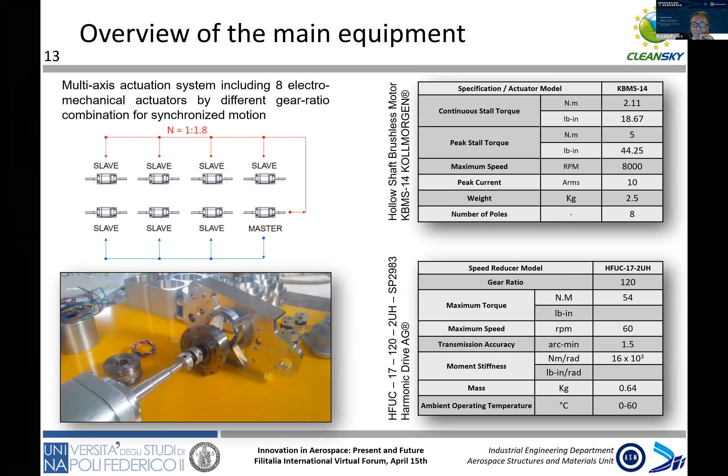As you can see here, there is a missing element in the structure - I didn't show it intentionally - it's the skin. When you design a morphing structure, you have to think about a skin that is able to accommodate the change of shape. You have basically two kinds of ways to think about your skin. You can think about a stretchable skin, one that is very elastic, that can be stretched and compressed.

Or you can think about a segmented skin, like in this other layout, that is composed of different segments that can slide on each other. The first one is much more performing from the aerodynamic standpoint. The second one is much more performing from the maintenance standpoint, the construction standpoint, the robustness standpoint, and a lot of other things.

We were very lucky because during that period when we were designing for Clean Sky, we were also involved as design leaders for the morphing trailing edge in the SARISTU project, led by Airbus, and in another project where we were leader for the design of a morphing aileron for a Bombardier regional aircraft. In both projects, we dealt with the design and manufacturing of the morphing devices, and we also had the opportunity to test them in the wind tunnel.

What we discovered is that even with small gaps in a segmented skin, you do not have a great influence on the aerodynamic standpoint, because of the position of your trailing edge - in our case, the flap. The flow is not so clean in that area, so you are more willing to accept some lower aerodynamic performance due to the gap, because you want to gain advantages in terms of production and maintenance of your final layout. So for the flap, it was considered not reasonable to go with the very smooth stretchable solution, because it was proved that no relevant advantages from the aerodynamic standpoint could have been achieved.

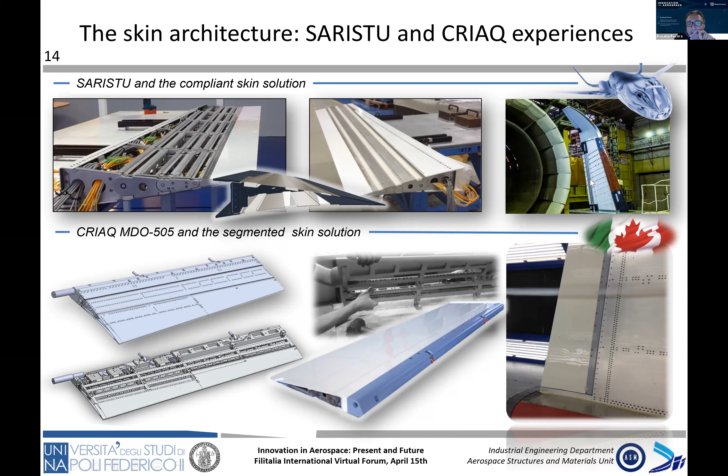And so we implemented the armadillo-like skin for the architecture I showed you before. Basically, we have different segments sliding on each other. Here, the structure is represented in overall camber morphing mode, and here in the secondary morphing mode, where just the tab is moved downwards and upwards for load control capabilities.

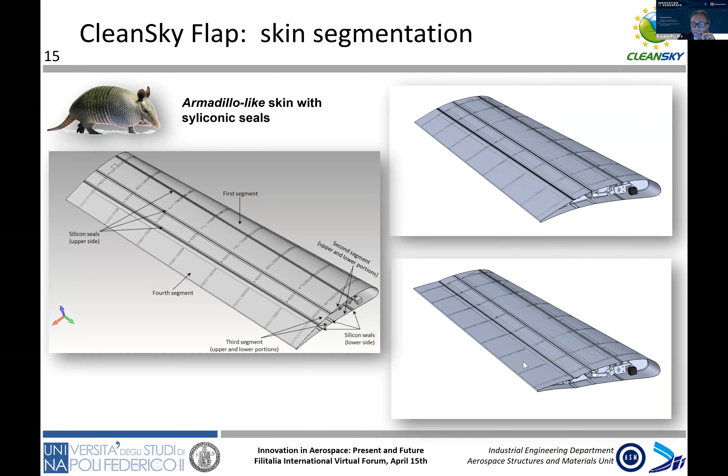A zoom of the skin just to show you how it was conceived. You have here silicone seals in order to avoid flow leakage around the panels, so to anyway assure a very smooth aerodynamic flow.

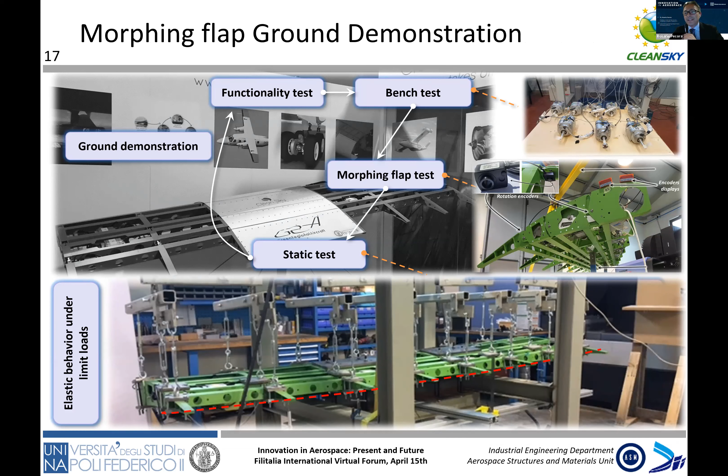Hey, just to cut in briefly, we're coming close to the time. Yeah, I'm finished. You're finished? Oh yes, just a couple of videos to see at the end how it works. Great. Okay, thank you.

So it was not just an exercise. We actually made a static test on this device up to the limit load, which was 1.5 tons, and the structure resisted well, remaining in the elastic field. And here is the unloading. Consider that this shape is also kept by the actuation itself.

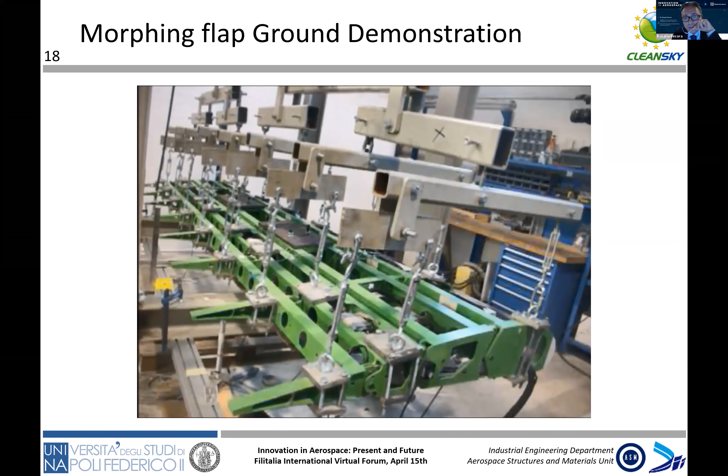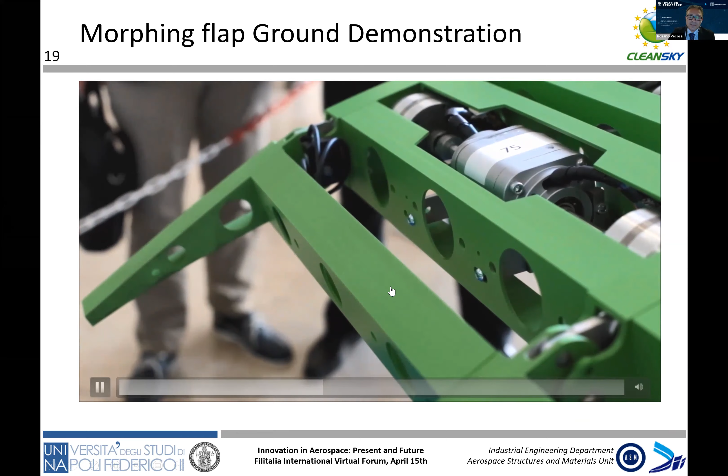And here you have a video in order to show you how the structure actually morphs. This is the overall morphing mode of the system, morphing mode 1, and here we have the tail of the actuation, morphing mode 2, where just this part is moving. Some details of the transmission line with a very sophisticated solution to avoid undetected failures.

And here you have the secondary morphing mode that is supposed to occur when the flap is stowed in the wing. Okay, as next steps, just a few words.

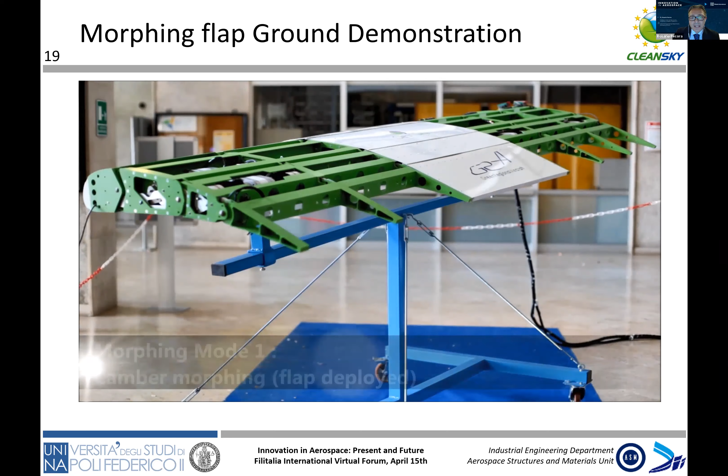We are now in the Clean Sky 2 program. We are dealing with true scale, also in span length, flap design and manufacturing. And this time we assure 3 different morphing modes, the 2 that you have already seen, plus a twist of the tip. We are now in the executive design phase.

We are supposed to do the wind tunnel testing by the end of this year, and next year we will have the ground validation of the full size demonstrator. So let's hope that we will be successful also with that challenge.

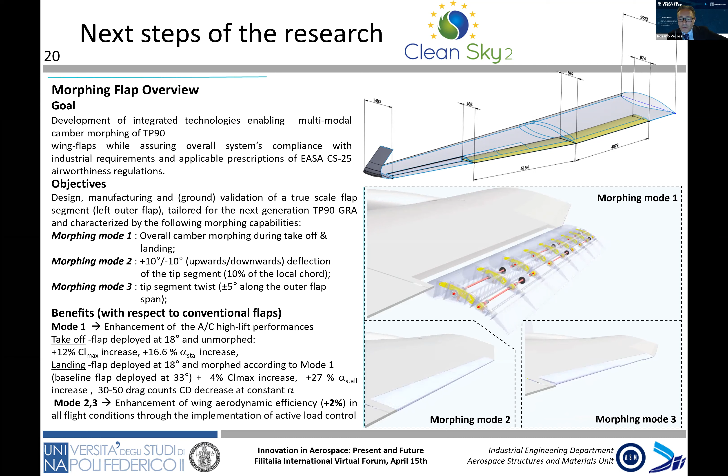So thank you for your attention, and greetings from Napoli. Saluti da Napoli.

Thank you, Professor Pecora. I know we're short on time, but it was a fascinating presentation because you let us take a peek in the near future of airplane structures, and also a peek inside the airplane wings. We only see the skin, we don't see the inside. So I'm not sure we feel safer or less safe now flying.

Anyway, so I have a question for you. Let me see if we can do it, if you have a quick answer. Is the weight of the morphing flap greater than the weight of a conventional flap?

Yeah, well, this is a classical question. The weight is, of course, greater because you are dealing with a structure that does something more, so you have some equipment installed on it. But what is important to say is that what you pay in terms of weight is gained in terms of efficiency that you obtain at the aerodynamic level. So the balance is positive at the end of the game.